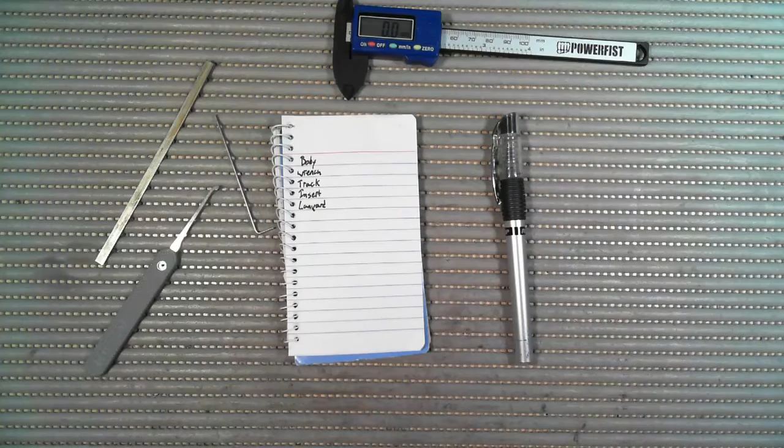This is going to be version 3, and this one's going to be made for this fish tape that I got lots of for really cheap. It's really good stuff. It's .0225, or 22.5 thousandths.

So what we need to do is measure everything up first, and this will save a lot of time in the long run. Measure everything up and figure it out. So I'm going to get my caliper out here. Let's get everything ready.

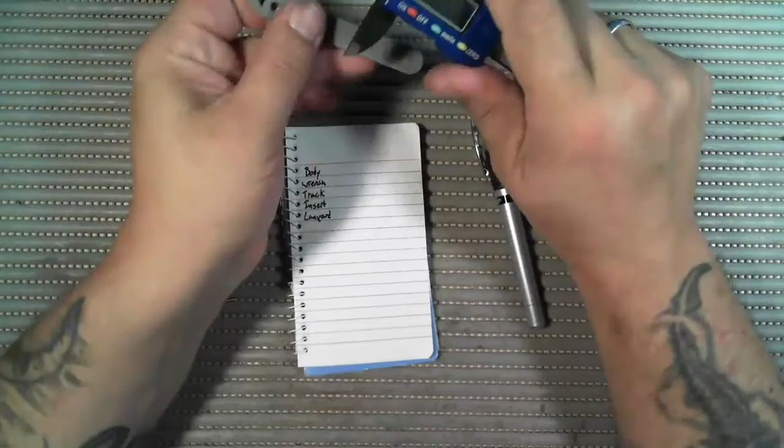So the first thing we're going to measure is the body. This is going to be the body of the pick itself, and I know from experience this is 80 millimeter, 80 mil by 12. Peterson is 12.2 or 12.3 or something like that, but mine, I always make 12. I'll make mine 12 by 12 by, I make mine 5. Peterson's I think is 4.4, yeah, but I make mine by 5.

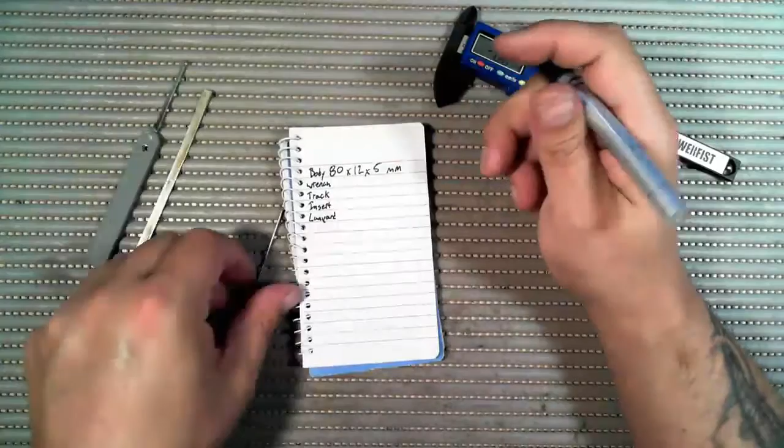This is all millimeter. And then we're going to go to the tension wrench. Anything that slides in and out of your handle, you're gonna want to oversize. So it says 2.5 mil, we're going to round that up to 3 mil. So it's going to be 3 by, that's 0.9 mil, squeeze it down to 0.8, so we'll call that 1 mil.

3 by 1 millimeter. And then the track, let's figure out the track. Well, let's do the insert first, actually. So our insert is our fish tape, 4.7, so of course round that up to 5 by 0.6, round that up to 1.

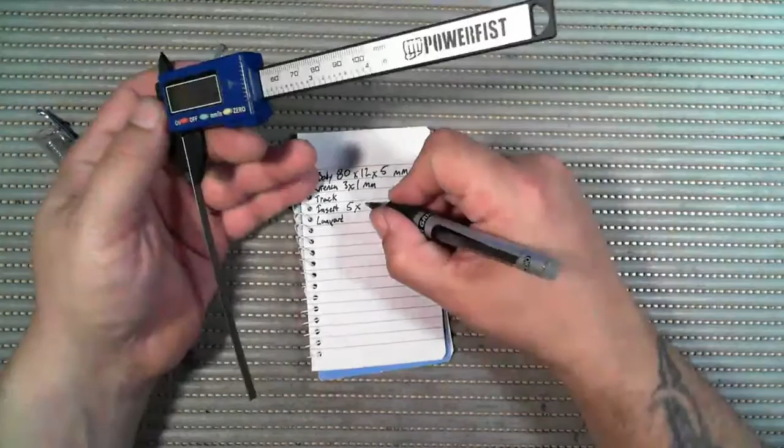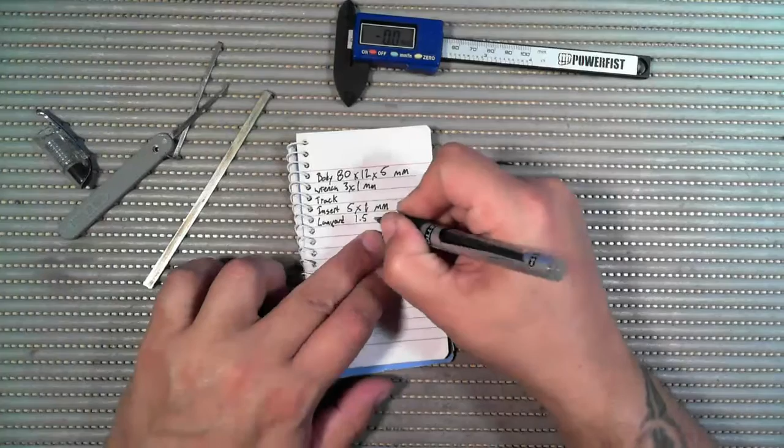And the length doesn't matter so much, we'll figure that out after. The lanyard hole, I just know from experience I want 1.5 millimeter lanyard hole, and that's from the center, so that'll end up being a 3 millimeter hole, which is what these ones have in them. So, and then they work out to be a good size.

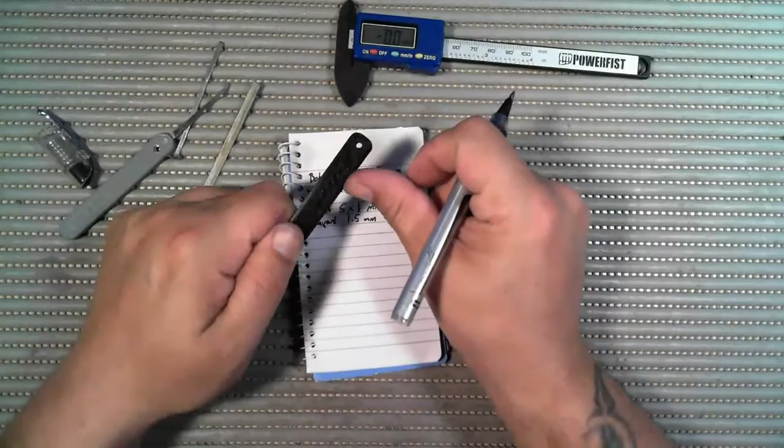And now our track, which is going to be the hardest part to work out. What I like to do is hold your pick like you normally hold it when you're picking a lock, say. So you're in there, however you normally hold your pick. Say I normally hold it about like that. So my thumb is about 10 millimeter back from the tip, so that's going to be the stop point for the button.

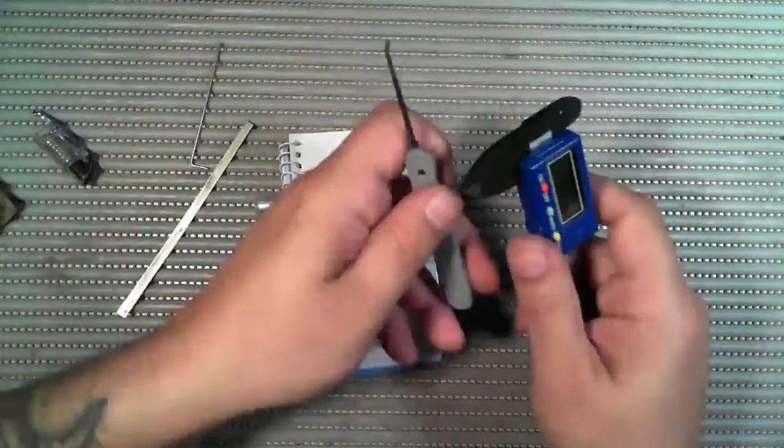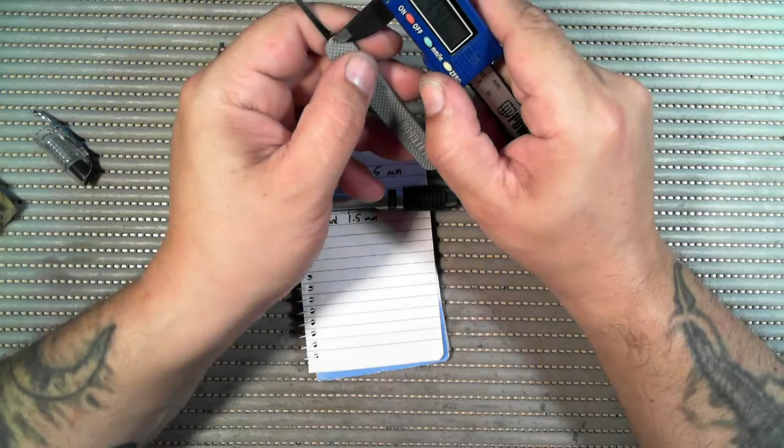So our button is going to stop probably about there, is where the center of our button is going to be. So we're talking 15 mil back, and then we have just a 45 mil pick when it's fully extended, because some of these are Bogotas and everything, so they're a little tiny bit longer. We'll say 45 mil plus the 15 will give us 60 mil is how long our actual insert is going to be.

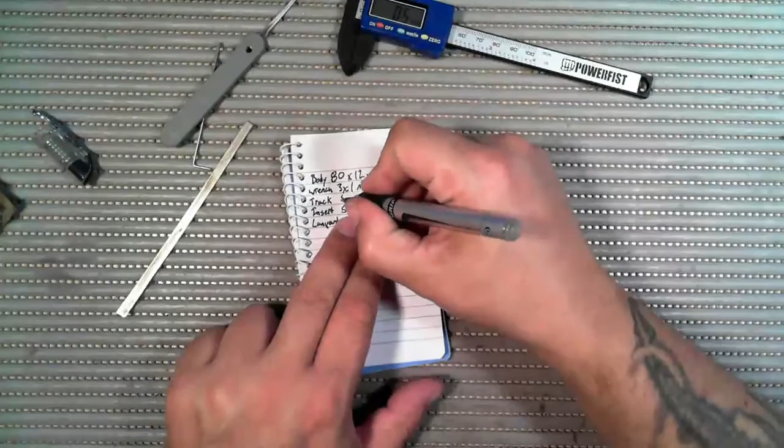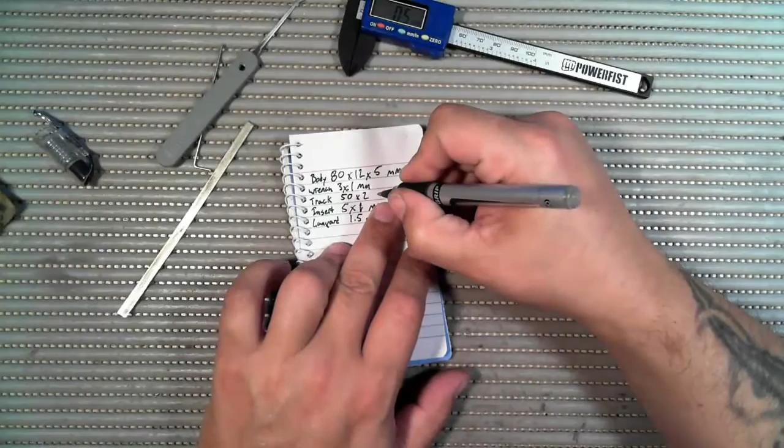But you can take that 15 off of travel, so the actual only travel you need is whatever this pick is going to be, 45 mil. We'll make it a little bit longer, we'll call it 50 mil of travel. So our track is going to be 50 by 2 millimeter, which is the width of the track. And then my offset, which means how far I'm going to go from the top, is going to be an offset of 15 mil. Alright, so we got all these numbers.

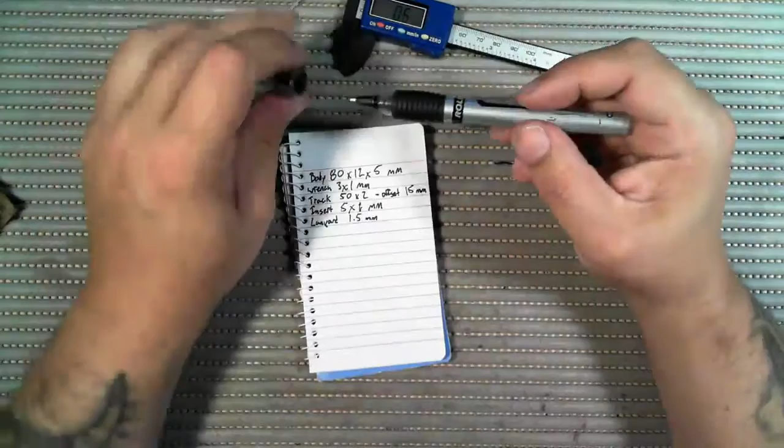I'm going to fire up Autodesk 123D Design, you guys can download it for free online. Go do that if you want to follow along, build your own. You don't even need a 3D printer if you guys want to make these, I'll show you how. Anyway, go download

Alright guys, we're in Autodesk 123D Design now, and we're going to get started. Now, first off, everything in this program, well, you're not going to be able to see all the when I click on menus and everything up here, so I'm going to describe it the best I can. So when I say combine, subtract, that means I've gone to the menu combine and gone to the option subtract.

Or other places I'll use hotkeys and stuff, and I'll tell you about that. So there are some menus that you won't see, but you'll see the main creation actually happen and how it works, and I'll do my best to describe that.

The main reason we made all the measurements ahead of time is so we don't have to do it now. Everything in here is going to be a shape. So first thing we're going to do is lay out all of our shapes, and it's going to help things go quickly. The first thing we're going to do is build our body, and we already know the size of all these things.

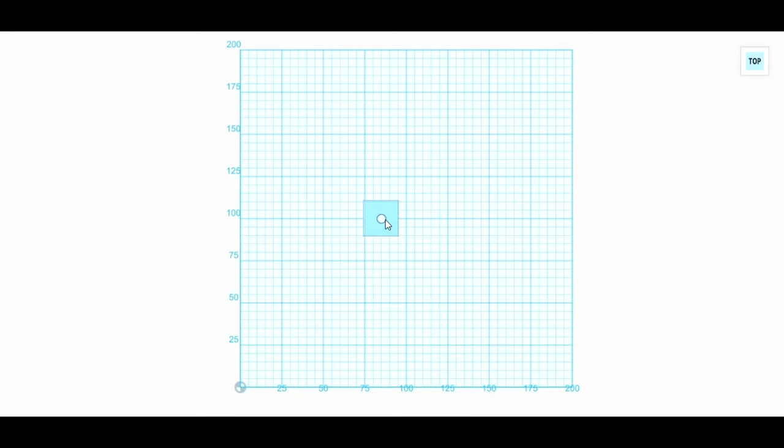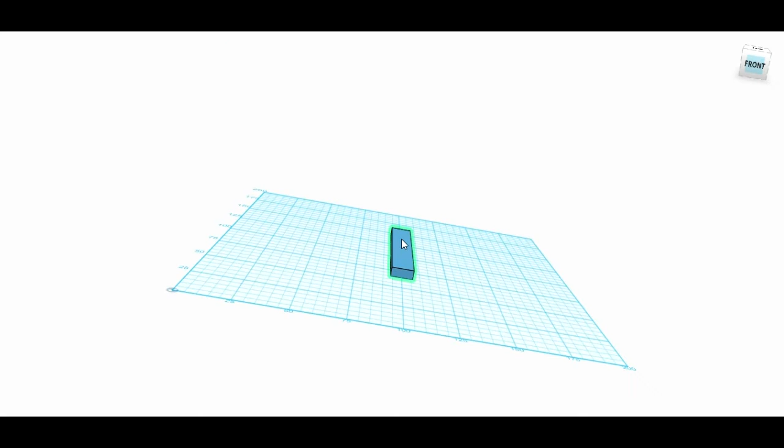So our body is 80 by 12, and I'm typing them in a box here you can't see, but when it comes time to do it, you'll know what I mean. I type in the dimensions 80 by 12 by 5, and I place it down. You can resize it after by clicking on it and clicking the Smart Scale option, but it's better to do it when you create it.

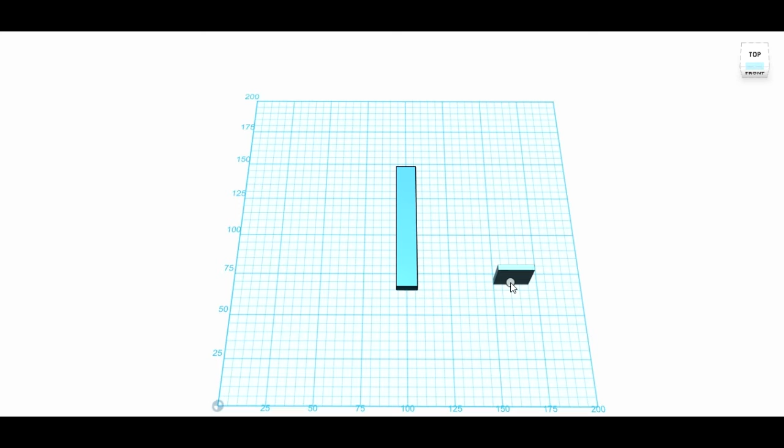So there's our body. Let's make another box for our tension wrench, which we know is 3 millimeters. This is length, sorry. We're going to make this the same length as the pick because it's going to stick out of it, so the length doesn't matter, same as the pick insert. The width we know is 1 millimeter that we've measured, and our height is 3 millimeters. So this is our insert.

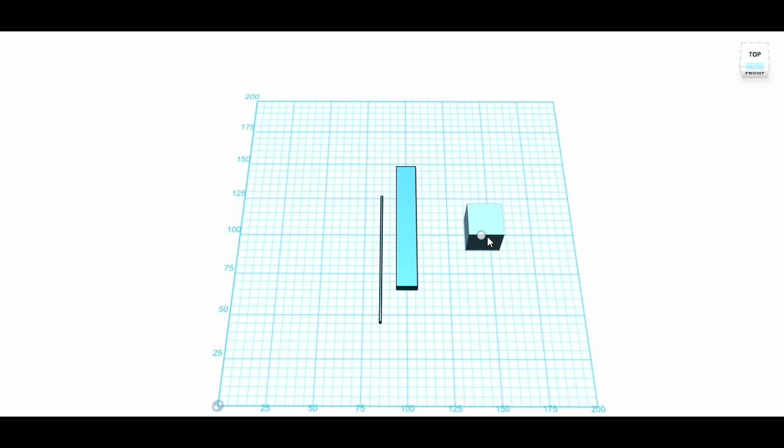That was our tension wrench. The next shape is going to be our insert, which we know can also make 80 millimeter long because it's going to stick out, and it doesn't really matter. The width we know is 5 mil, and our depth is 1 mil, and that is our insert.

And the next thing we have to make is a lanyard hole. So the default is 10. We don't want a 10, we want 1.5, which will give us a diameter of 3 in the end. So I want 1.5.

Let me quickly remeasure the hole here, one of my other ones. Yeah, it's 3 mil, so 1.5 is right. It just looks small for some reason here, but anyway, that is our lanyard hole, or will be our lanyard hole. And what do we have left?

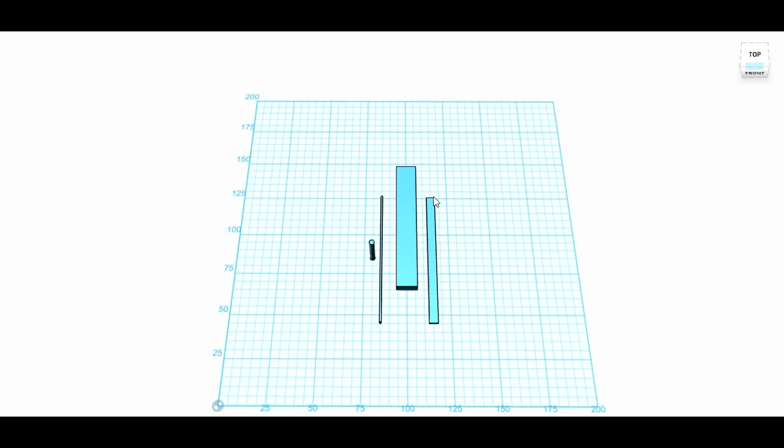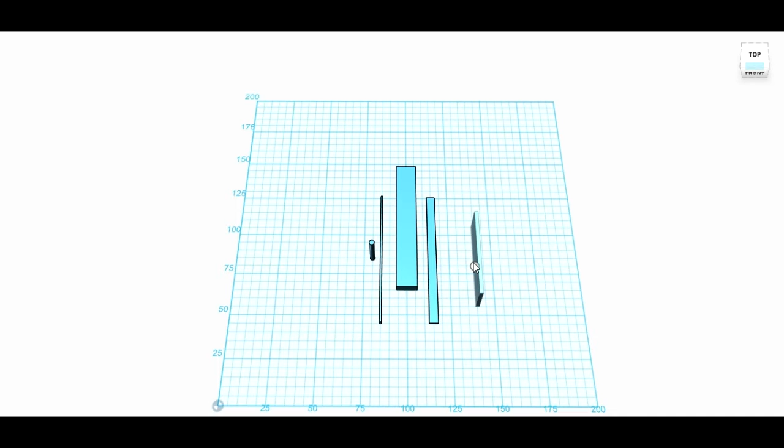We have our track. So let's make our track, which is another square, another box. We know our track is 50 long. We know our track is 2 wide. Oops, wrong box here, 2 wide, and the height and depth don't really matter. We'll just make it 10 just for the hell of it, because of the way we subtract it out.

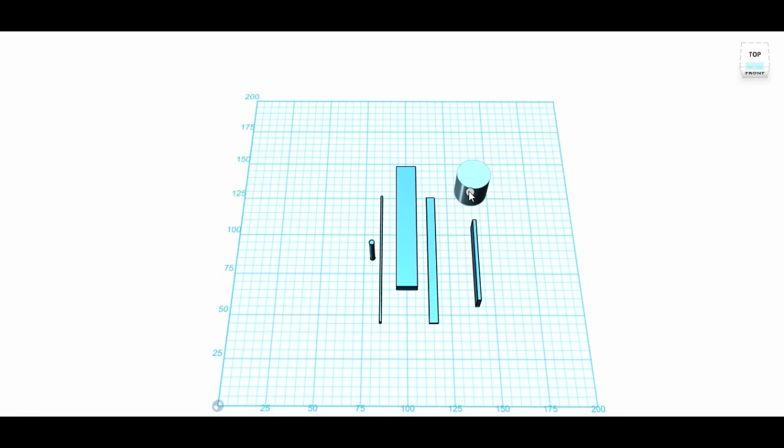So there is all of our shapes. The one thing I forgot to measure when we were back taking our measurements is the button for the slider. So I know that it's an 8 mil button, so a 4 mil radius, that's going to be our button. Anyway, now we have all our pieces.

Let's work on getting it all together. This is the main body. First thing we have to do is contour it quite a bit.

So what I'm going to do is a shortcut. You can go up into the menus. The first time you find it, you go to menus. Up in the menus, you'll see modify, and then you'll go down to fillet. And E is the shortcut.

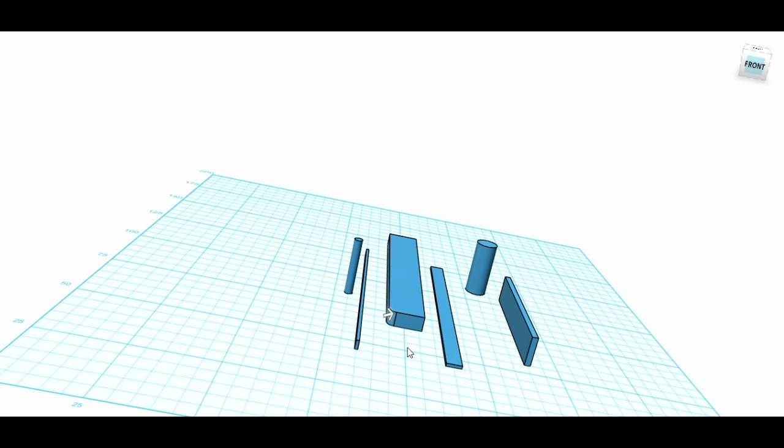So if you hit E, or you click on fillet in the menu, you click any one of these corners. We'll do all the corners first. You can either move them in with the mouse, or you can type in a value. I'm going to type in a value of 3, and I'm going to do that for all these corners. So I'm just hitting E to make it really quick, type in 3 in the box for the value. Makes it go a lot quicker than going through the menus and trying to slide the proper value and everything.

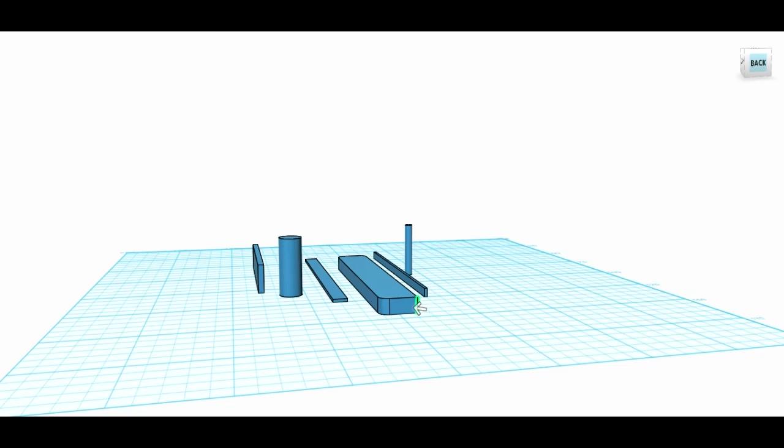Alright, so we have a little bit of contour there, but it's not enough. We want more, so we're going to hit E again, select this top ridge, and drop it in 1. That breaks the edge a little bit, makes it look nice.

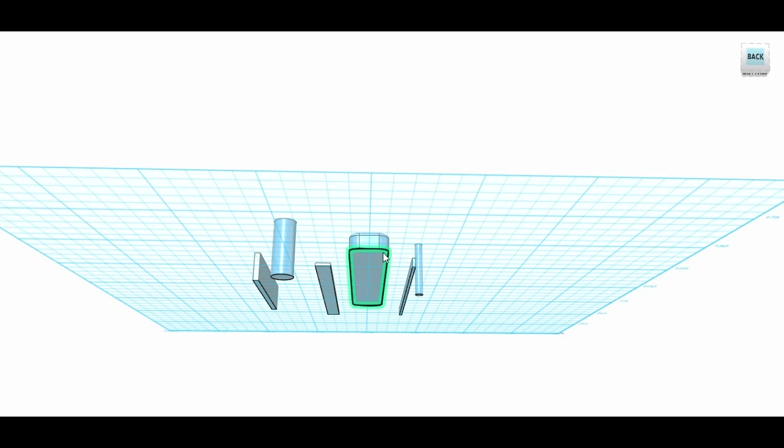We're going to do the same thing to the bottom. E, select the edge, fillet it in 1, and there we go. So that's starting to look pretty good for the body of the lockpick here.

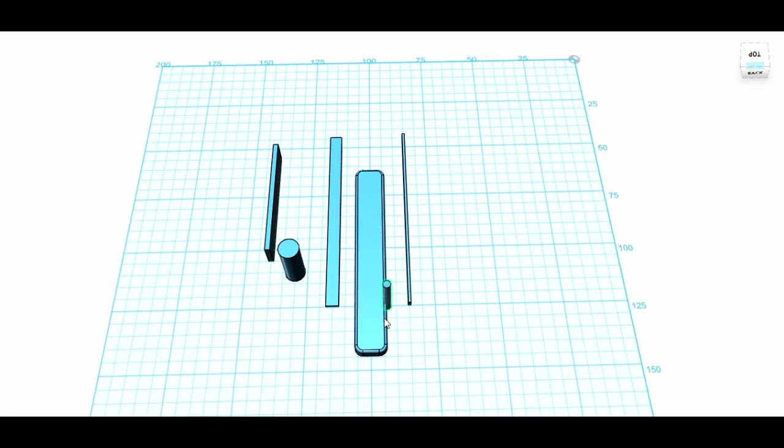Next thing we're going to do is drop in a lanyard hole. So let's take our lanyard we created, and we're going to put it in as close to center as possible. That looks pretty good. The snapping on this program is actually pretty good. You don't pay for this program, and it's pretty damn good. I mean, that snaps too pretty well.

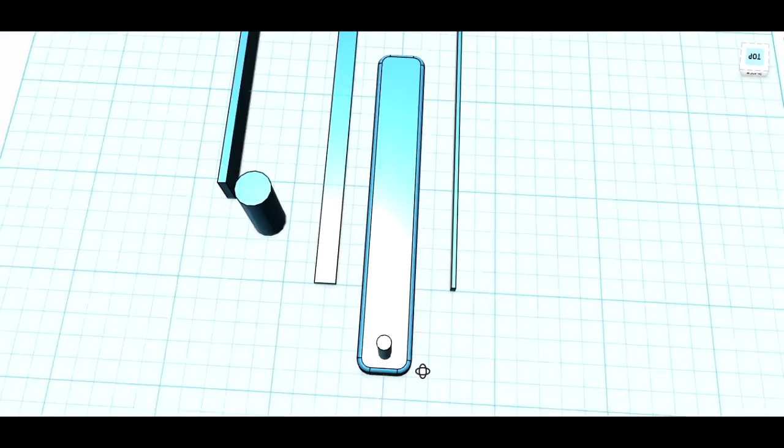I do kind of like that placement. We will leave that there for now and not cut it out yet.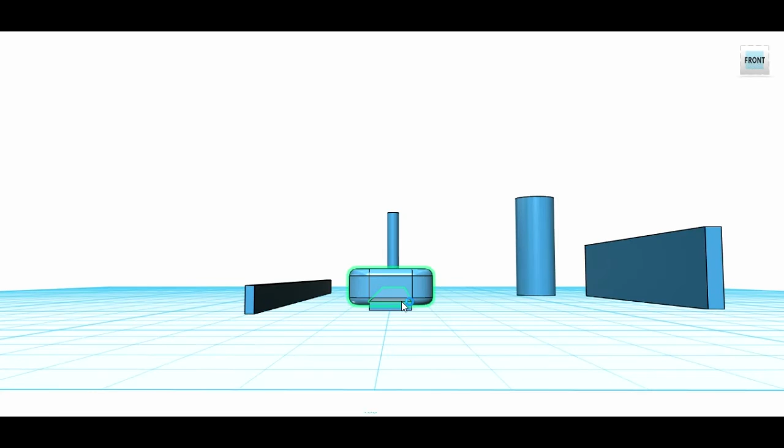Next we are going to do our insert, the actual pick insert itself. We'll move it over here, and let's see, I'm just going to move it around, try to get it right in the center. I don't know if you guys can see that, but it looks pretty damn close to center to me.

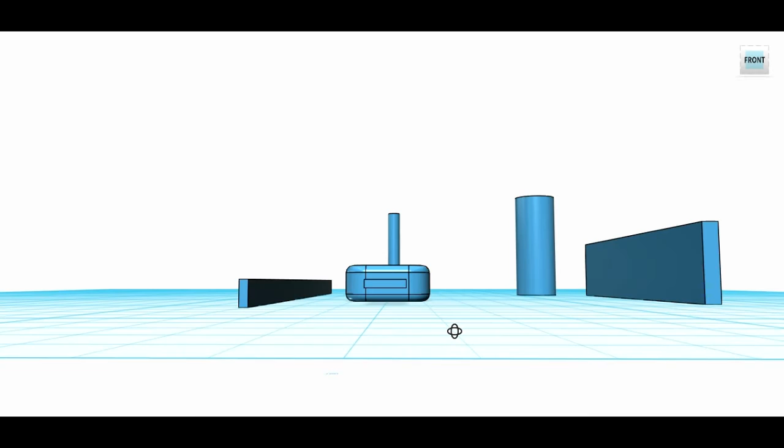Yeah. Looks like it could go a tiny bit one way or the other here. Back out.

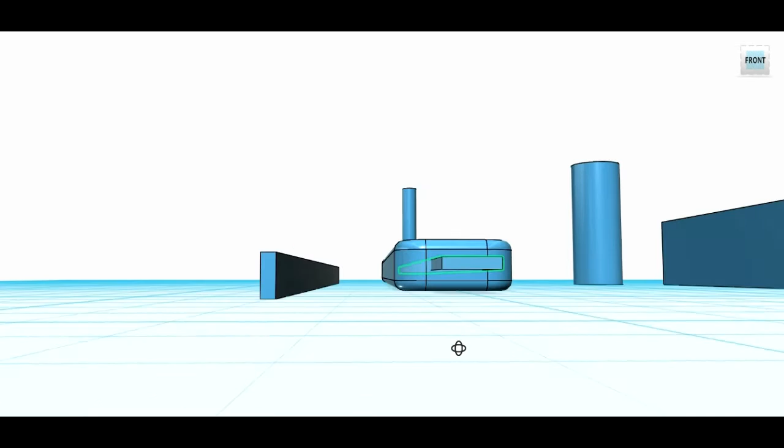Because it snaps really well, often all you have to do is grab it and move it back, and it'll snap as it did right to the center. So perfect. That is the insert, and of course we don't want it to go all the way back like that.

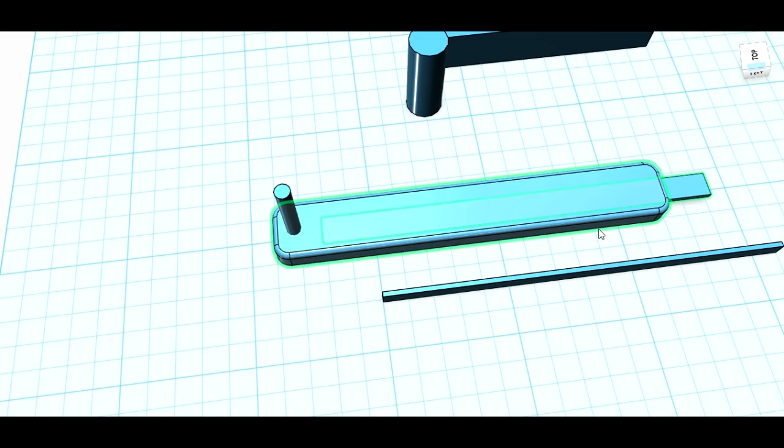This is an 80mm insert. Remember, it only has to be like 60, 65 or something. But we want as much plastic in there as possible, so move it out a bit, at least there.

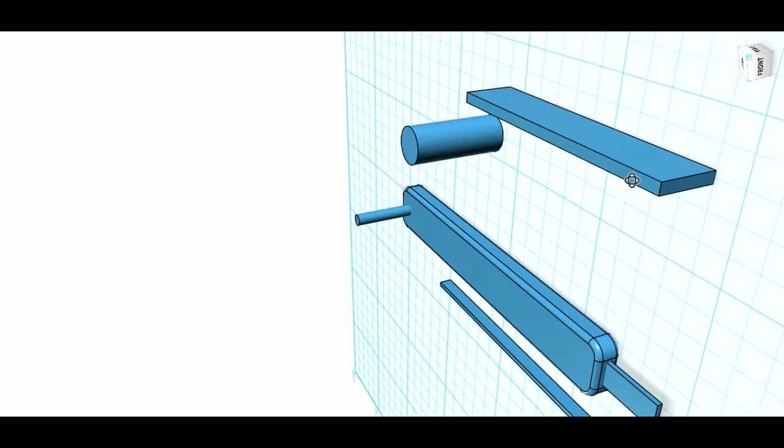Alright, so we're also not going to void this out yet either. We want to make sure everything's placed right. Sorry, the orientation gets all messed up here sometimes. Alright.

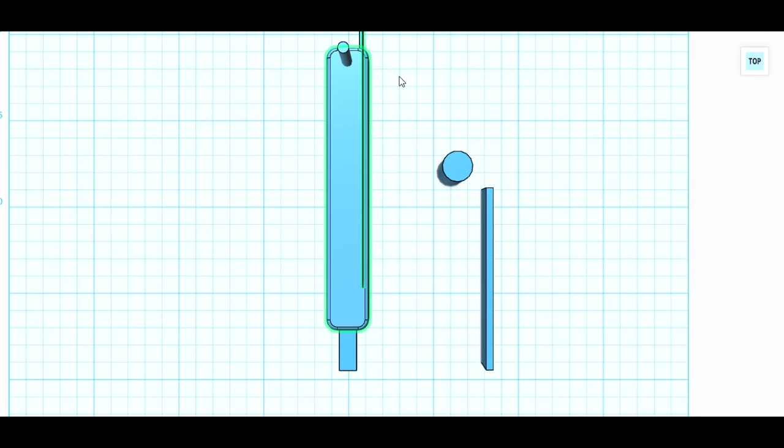And then we are going to place the tension wrench, and depending on what side you want it on, it doesn't really matter in the grand scheme of things. What did I put on the last time? Yeah, I put it on the right hand side here, so I'll do that again. Our tension wrench is on the right hand side.

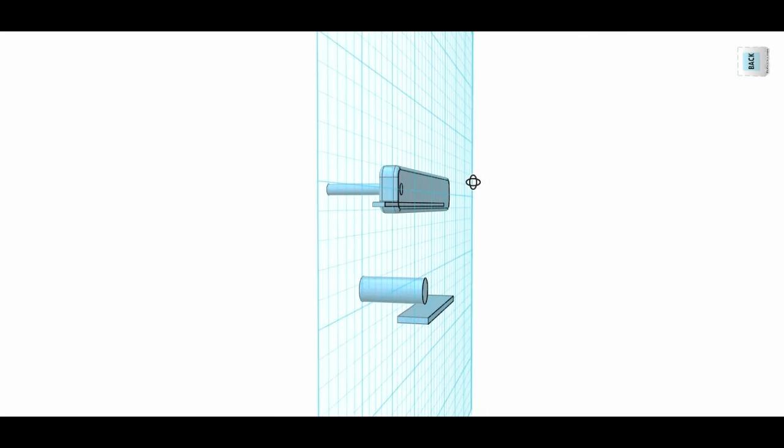I like how the orientation of this thing gets all messed up all the time. I think it'd be... Come on. Huh. Anyway.

And we're going to do the same thing here. We're going to try to center this. Obviously not working that way. Try to get it this way.

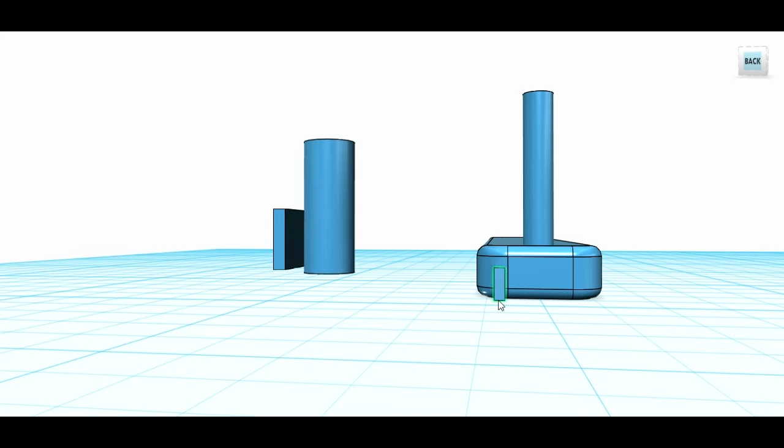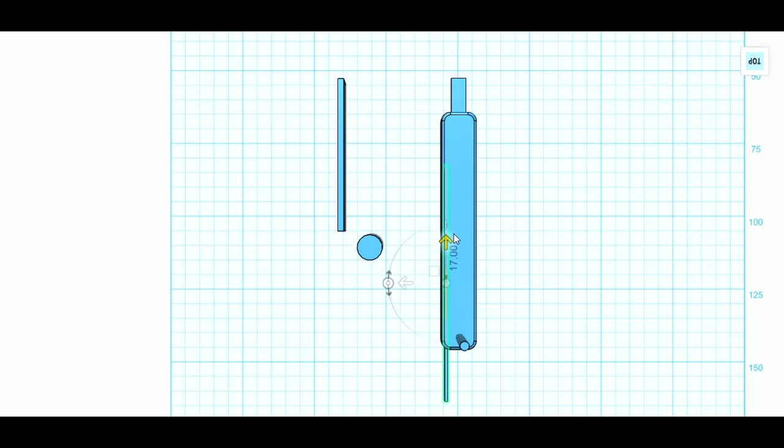This thing out, so we don't want it that deep. Probably gonna go to about, we'll leave like 10 mil in there at the end. Move it in a touch, just so it has some meat there. See how that looks. It's going to come up.

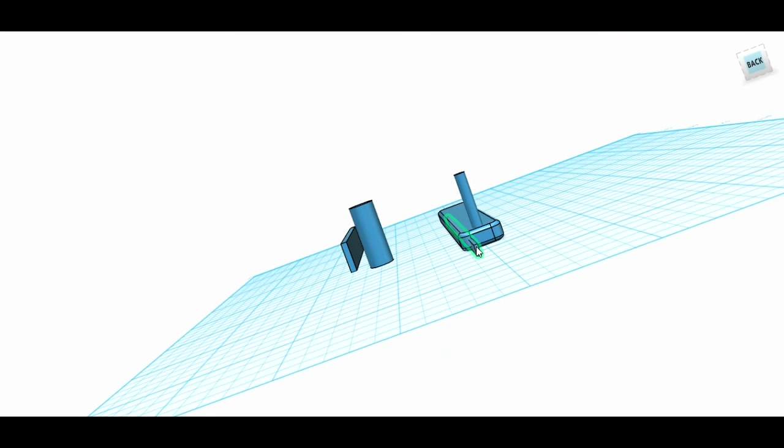There we go. Looks like it can go over a little bit more towards the edge. Probably about like that. So that looks pretty good for the tension wrench.

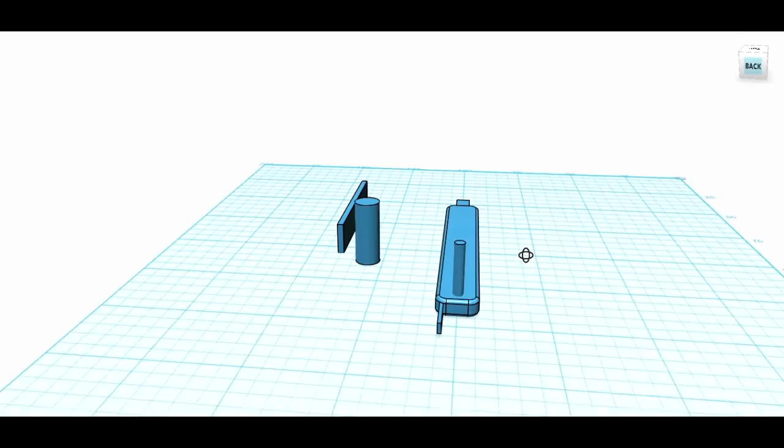Of course, I'm not going to delete it yet. Now we're going to get the track in there. Actually, we'll leave the track till after we've removed all this stuff. We just want to make sure that none of this stuff is overlapping. And it's not. It looks pretty good so far.

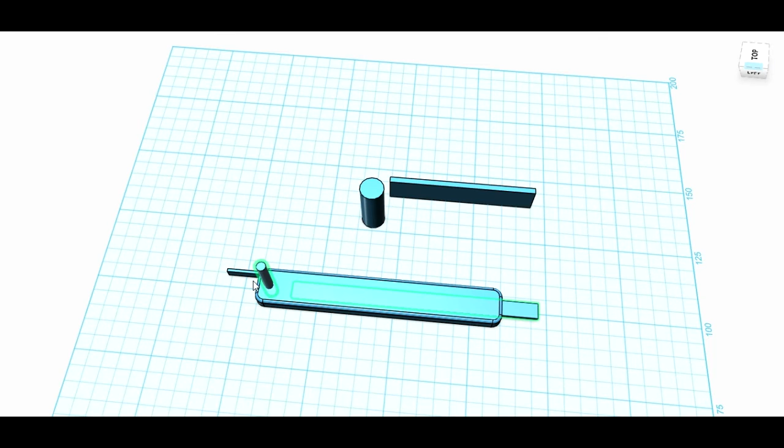These are pretty close. I mean, they're pretty close. I might want to maybe move the track over, or the insert over a little bit to one side, just to try to get a little bit of that room back, because that looks kind of close.

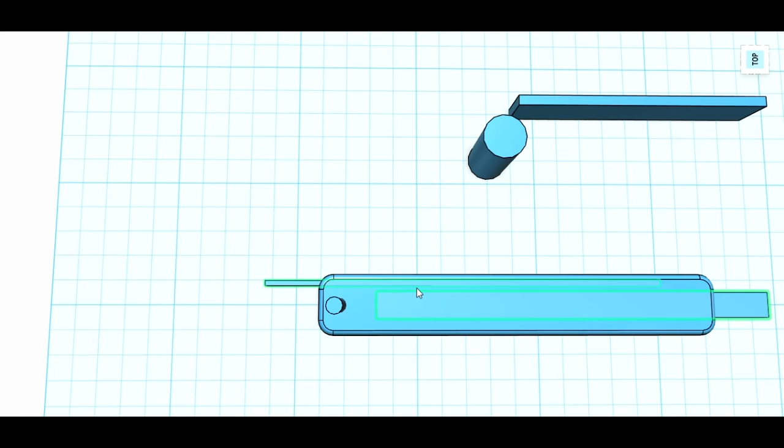Question is it too close? That's a millimeter. It's about a millimeter away. Yeah, a millimeter's not bad. I'll take a millimeter. Anyway, so it's looking good.

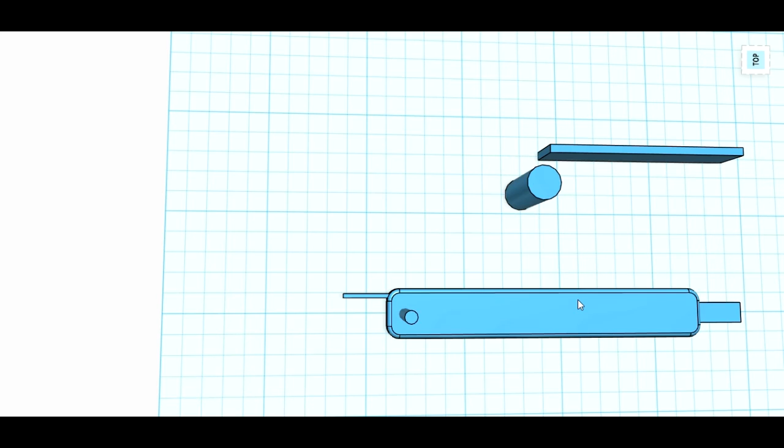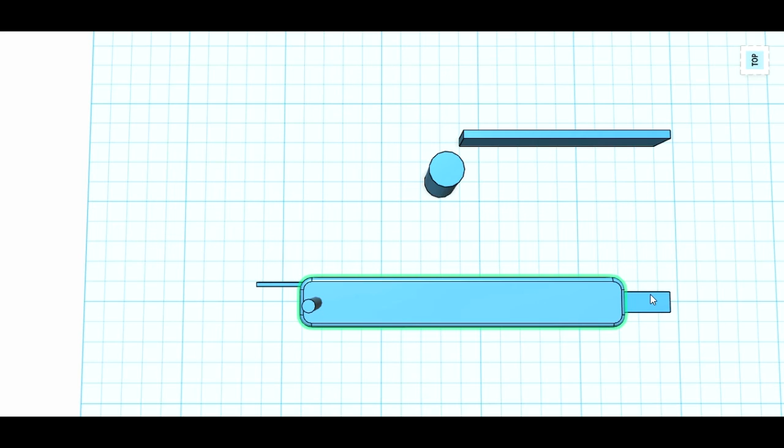We're going to just start subtracting all this stuff, guys. Up in the menu, you'll find an area that says combine. So the menu is called combine, and under there's an option called subtract. And you always start with the object you're going to be keeping, and then end with the object that you want to remove from it.

So we're going to do the insert first. Start with the body, then click on the insert, hit enter, and as you see, we have a nice void.

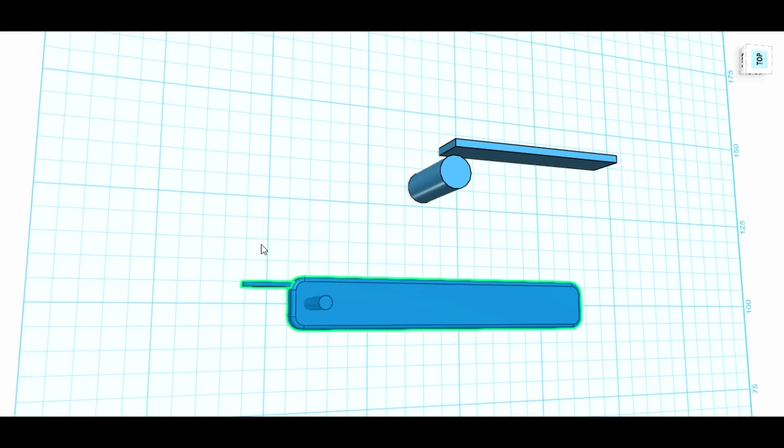Then we are going to do the tension wrench. Same thing: we're going to go up to the menu, combine, subtract, select our body, select the tension wrench, enter. And now we have a hole for our tension wrench.

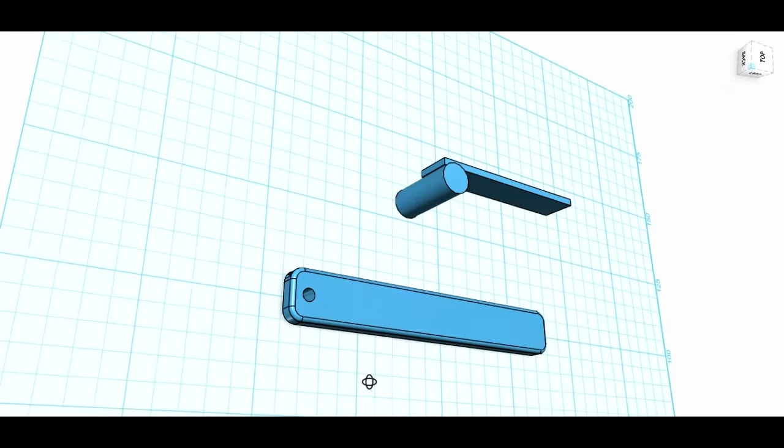Same thing for our lanyard hole. We're going to combine, subtract, select our body, select cylinder, enter. There we go. And for this lanyard hole, we're just going to feather it a little bit here.

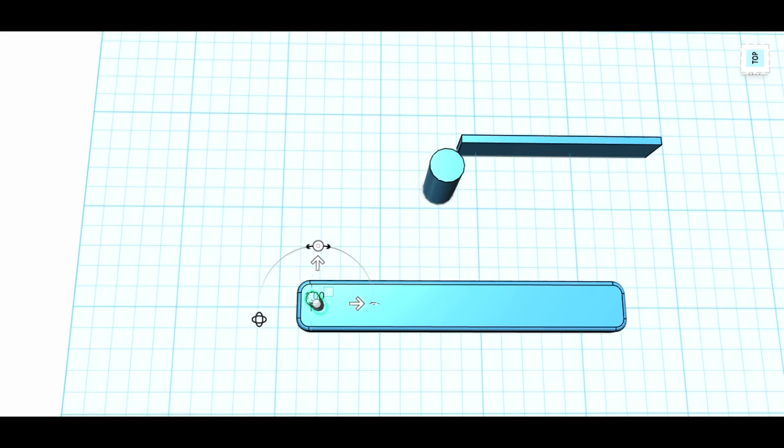Actually, I don't know if I like that. I might put it in a bit more before I delete it. I'm going to move it over a bit, guys. That looks better. Just a little bit more meat there. That's too far. Yeah, that's probably good.

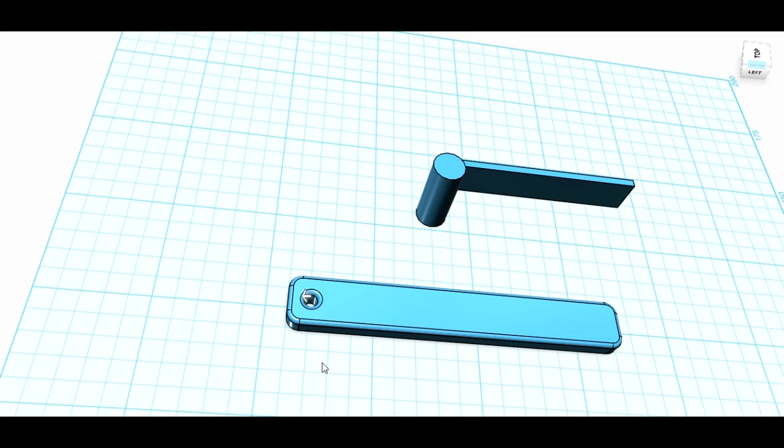Okay, let's do that again. Let's subtract one from the other. Alright. And we're just going to hit E again and fillet that edge, just give it a 1. Do the same to the back side. E, fillet the edge, 1. There we go. So we have our tension wrench hole, our lanyard hole, our insert hole.

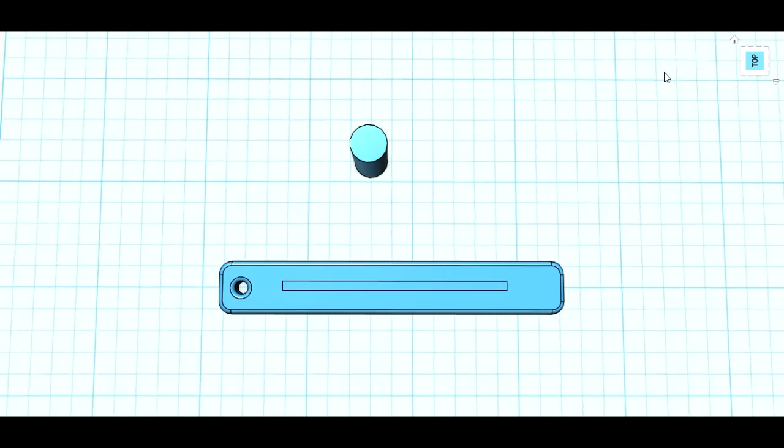Time to drop the track down. So this is one of the more important parts. You definitely don't want to screw it up, because this is how the whole thing works pretty much.

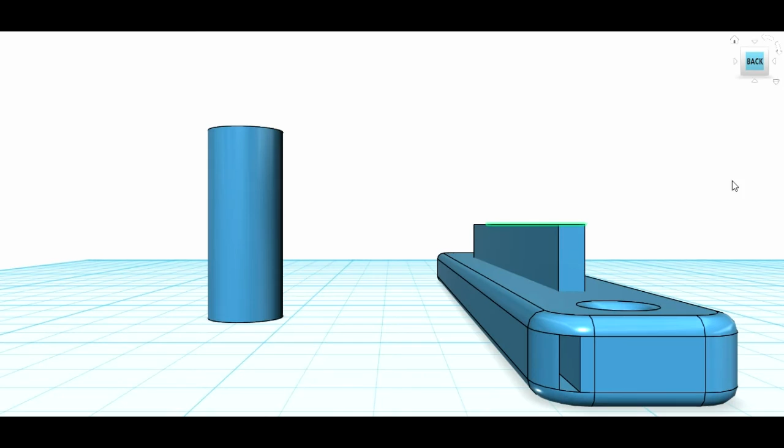So remember, our offset is 15. We want to be 15 mil from the end, which is about there. Not quite centered.

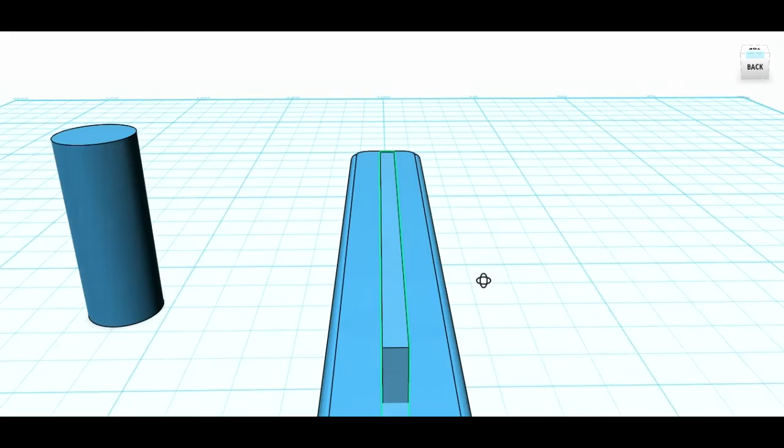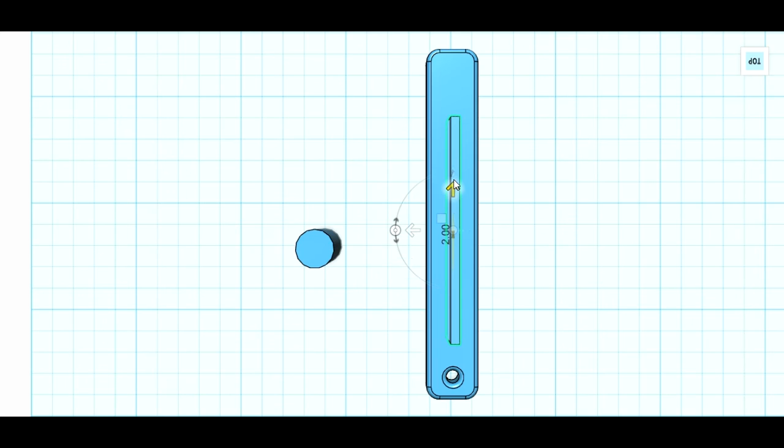Do that. Alright. And with our 15 mil offset, it can go up a little bit more, over there. And I think that is where our track is going to be.

We just want to make sure that it's in, but not all the way through, which it is. So we will...

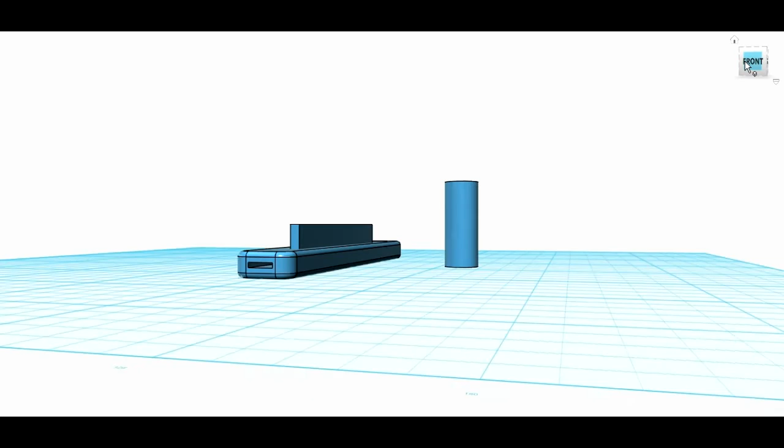The one thing I don't like about this program is the control. It's not very good, like the moving angles and stuff like that. I've used other CAD programs, 3D rendering programs and stuff. A lot of them are better, but what do you want? It's free.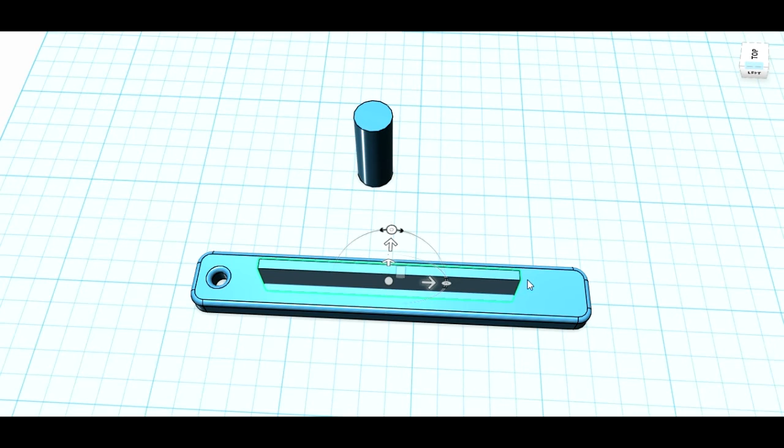So anyway, that looks like where our track is going to be. And we basically just do the same thing: we go subtract. Boom. So that is our SlickPick version 3.

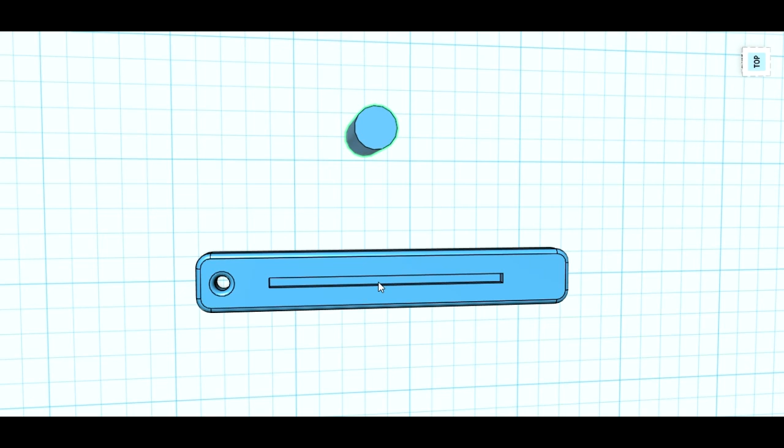You guys could have used any of your own dimensions and come up with the same thing. The button itself, well, let's make the button really quick. How tall do you want a button really? I'd say 2 millimeter. So let's resize this button.

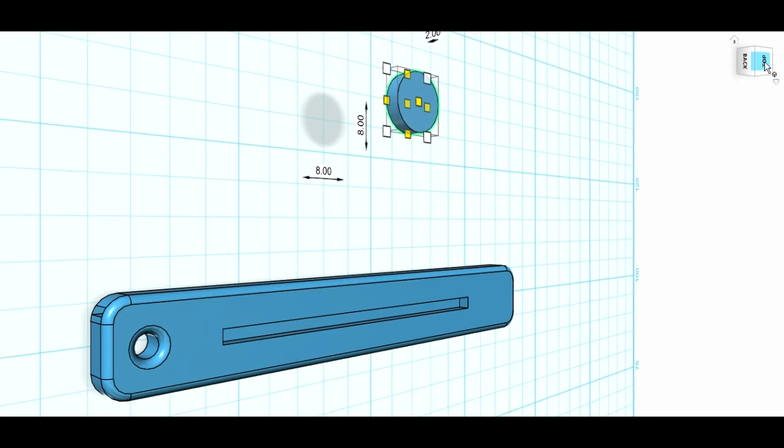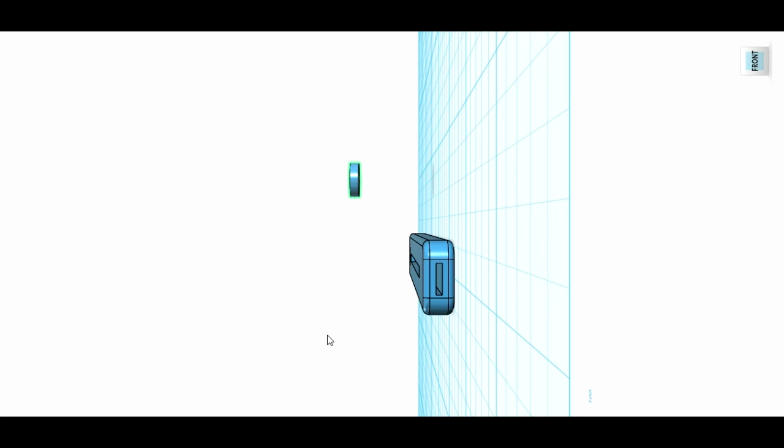2 mil. Alright. Resize is good. And then we're going to drop it down to the ground. Go.

And then we are going to fillet the edge. Probably one, one should be good. Let's see what 2 looks like. We go 1.5. Yeah, we'll take 1.5.

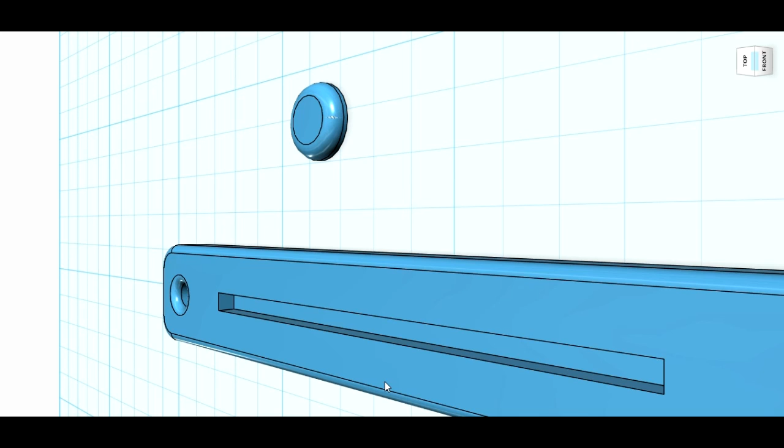And then we actually need a hole in there that's the same size as our track, which is, well, I'll say 2 mil. And then the material itself, which this fish tape is only half a mil, so 0.5. That is going to be inside of our button.

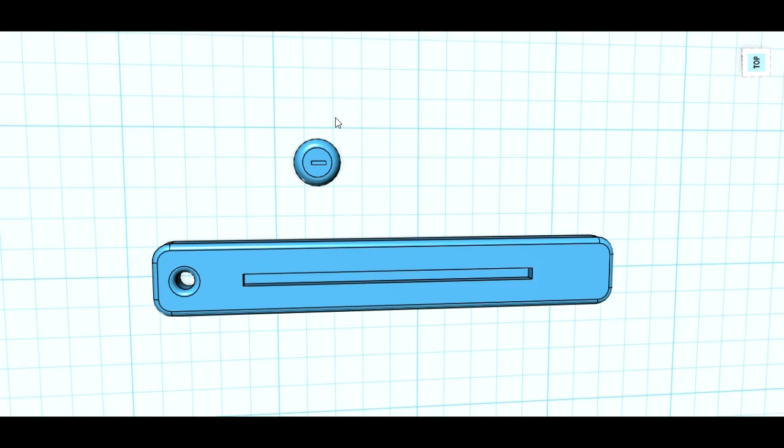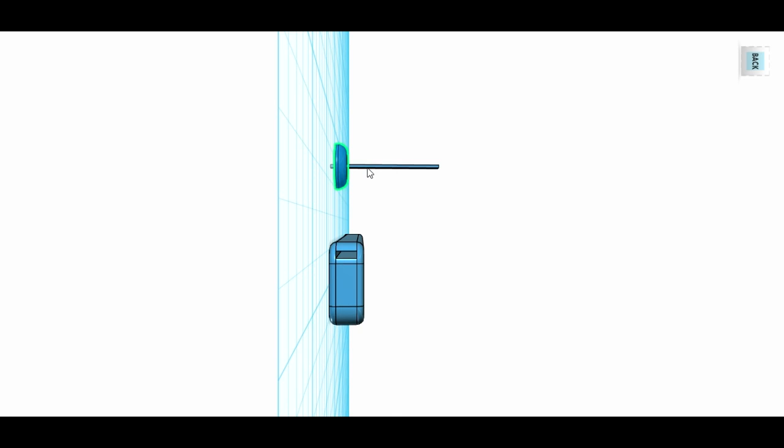Make sure that it's actually in there for when we cut it out. And then do our subtract. Now we have our button.

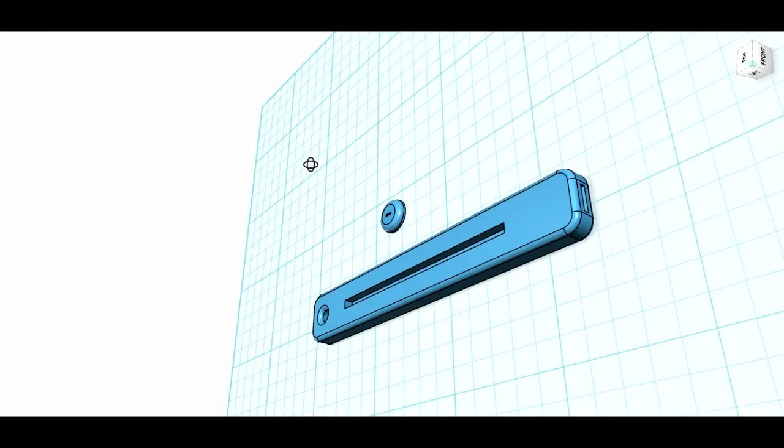Alright guys, so this is all ready to go. Depending on the printer that I choose, you might not be able to do those 2 mil buttons, and that's fine. I might have to up them to 3 mil or whatever, but that is it.

From here, you can go off to the side. You can't see it in the menus, but off in the side menus, you can go to save a copy to my computer. So you'll want to do that, but also there's an option to 3D print and order online. And when you do that, there's a service in there called 3D Hubs, and you can actually order online from a person near you.

You can choose from a whole list of people that are actually right in your area, and pay by PayPal over the website, and go pick it up in person from the guy himself. You can pick one that's close — the one I go to is like 3 miles away from my house. It's really close, and I get them printed out for like about $1 a piece. It's pretty good.